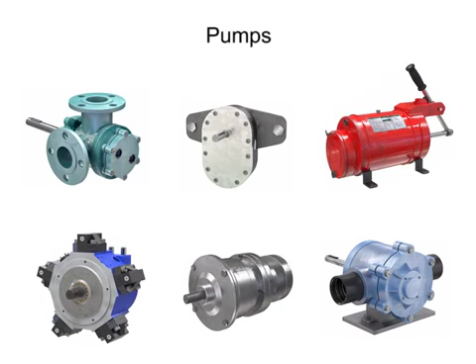Many different types of pumps exist to assist fluid movement in a variety of systems. An external gear pump uses two gears rotating against each other to provide fluid movement.

One gear is driven by a motor connected to a shaft. This is called the drive gear because it is driven by a motor, and it in turn meshes with and drives the movement of the second gear.

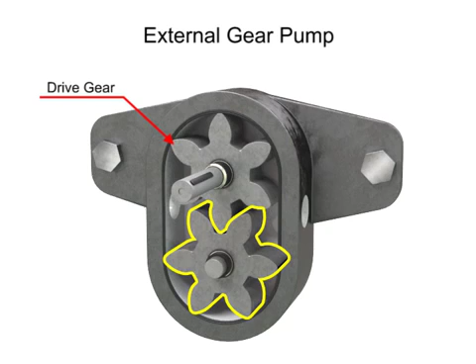As the gears rotate away from each other and come out of mesh, they create an expanding volume on the inlet side of the pump. This creates a vacuum at the inlet port, allowing fluid to flow into the pump.

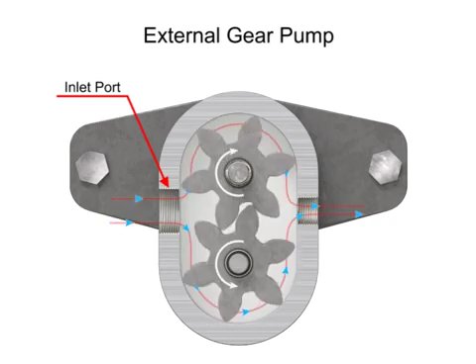Then fluid flows into the cavities and is trapped by the gear teeth. As the gears rotate, a flow path is created around the outside of each one. Fluid trapped in the slots between teeth is carried around and discharged into the cavity with the outlet port.

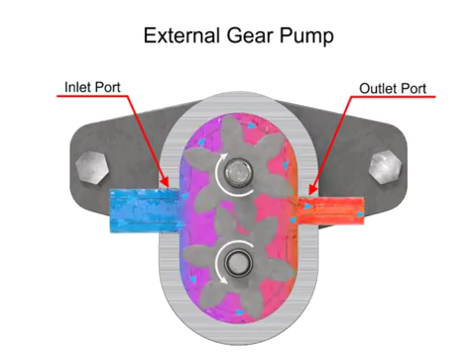Meshing of the teeth in the center of the pump seals the outlet port from the inlet port. No fluid passes between the gears.

The advantages of external gear pumps are their high speed and pressure, relatively quiet operation, and that their design accommodates a wide variety of materials.

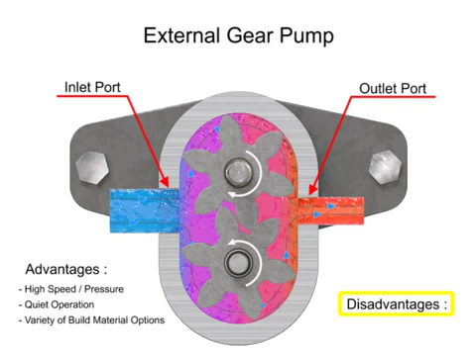Disadvantages include bushings in the liquid area can become worn and that they have fixed end clearances.

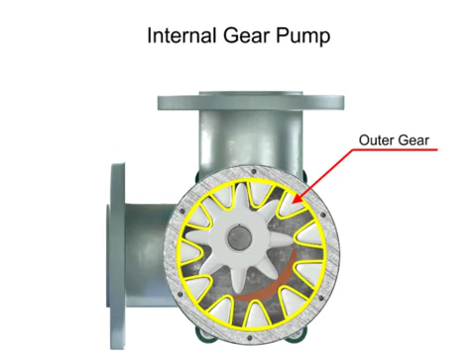Internal gear pumps are exceptionally versatile. This type of pump has one inner gear which is inside a second outer gear. The inner gear has a shaft driven by a motor and has teeth that protrude outward. The outer gear has teeth that protrude inward toward the center of the pump.

As the inner gear rotates, it meshes with and moves the outer gear. Liquid is trapped in the gear spaces and carried from the inlet to the discharge. A stationary crescent-shaped divider separates the intake and discharge portions of the fluid.

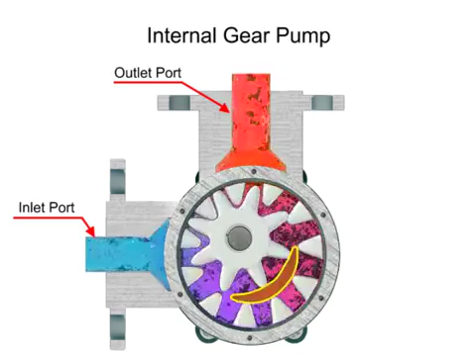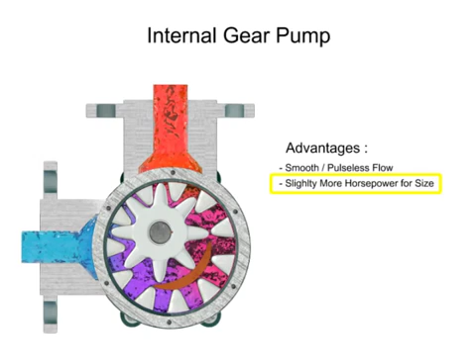Advantages of internal gear pumps are a smooth and almost pulseless flow, and slightly more horsepower for its size. Disadvantages are its higher cost, limited size range, low to moderate pressure ratings, and few sources of manufacture.

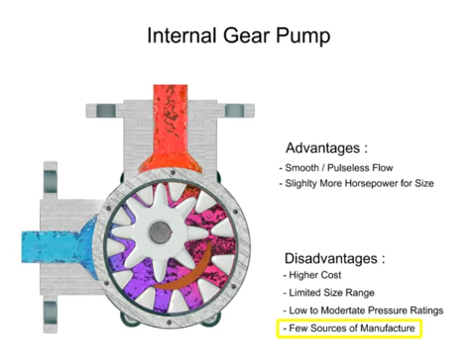A rotary vane pump is a positive displacement pump that consists of vanes mounted to a rotor. The vanes are on an off-center drive shaft. As the shaft rotates, the variable length vanes slide in and out to maintain contact with the pump housing.

The tension in the vanes is maintained by either springs or hydraulic pressure. As the vanes rotate, they create chambers of varying sizes within the pump.

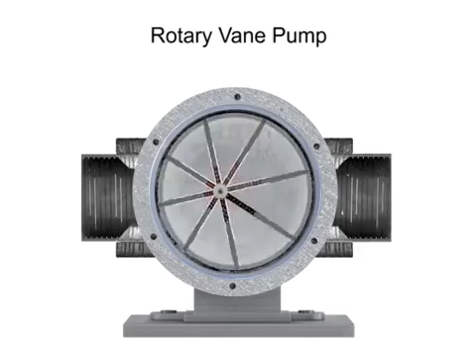Fluid enters at the largest chamber. As the vanes rotate and retract, the chambers get smaller, forcing fluid to exit through the discharge port.

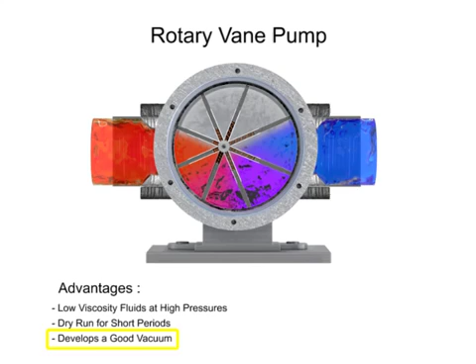The advantages of vane pumps are that they can handle low viscosity fluids at relatively higher pressures, can dry run for short periods, and develop a good vacuum. Their disadvantages include complexity and their unsuitability for both high pressure and high viscosity fluids.

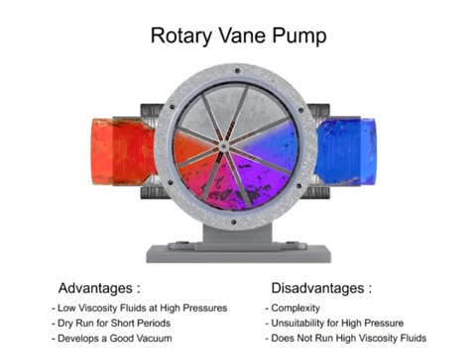Piston pumps come in many different forms. A swash plate is a device used to translate the motion of a rotating shaft into the reciprocating motion of a piston.

Swash plate piston pumps have a rotating shaft connected to a cylinder block containing pistons, which are pressed against a stationary swash plate that sits at an angle to the cylinder.

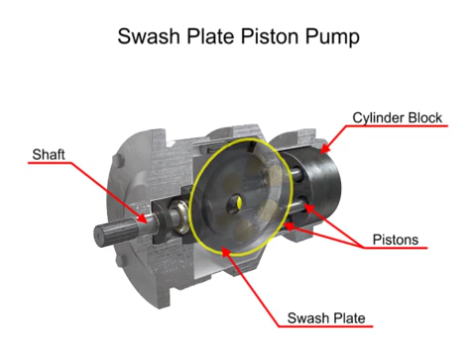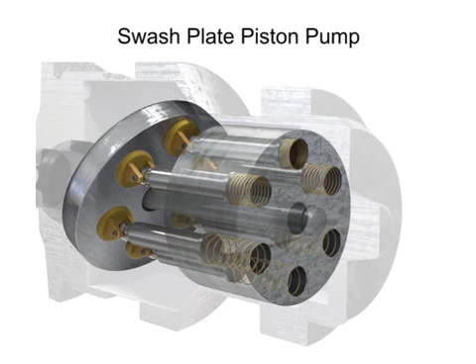As the shaft rotates, the pistons move against the swash plate, causing them to reciprocate within the piston block. The pistons create a vacuum that forces fluid in during half a revolution and expels fluid during the other half.

On the intake stroke, a spring ensures the pistons pull back and maintain contact with the swash plate, causing fluid to fill the empty cavity left behind.

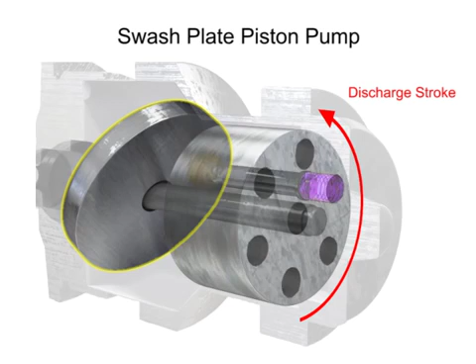On the discharge stroke, the angle of the swash plate forces the pistons back inside the piston block and discharges the fluid. The greater the slant on the swash plate, the further the pump pistons move and the more fluid they transfer.

Piston pumps, in general, are manufactured with closer internal fits than other pumps. This means that internal slippage can be less so that they operate with reasonable efficiency at pressures both too high or too low for the operation of other pumps.

Radial pumps are designed so the pistons stroke in a direction at right angles to the shaft.

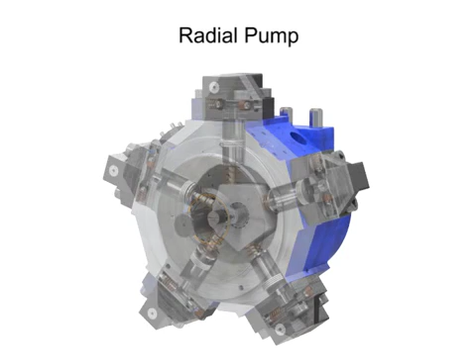The pistons are arranged like wheel spokes around a cylinder block with an eccentric central cam mounted on a drive shaft.

As the shaft rotates, the cam moves towards the pistons, forcing them down into the cylinder block and discharging the fluid. As the cam moves away, springs help retract the piston and cause the intake stroke. Check valves ensure that fluid only enters the inlet ports and only exits the outlet ports.

Radial piston pumps have a low noise level, very high loads at low speeds, and high efficiency.

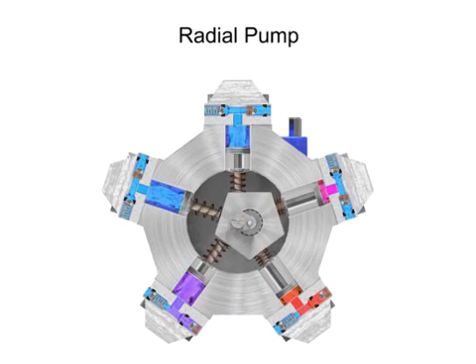Hand pumps are used when a source of power is not available or where the extra expense of a power pump isn't warranted. For example, they are used on shop presses and other portable equipment, serve as standby pumps, and serve as sources of emergency power.

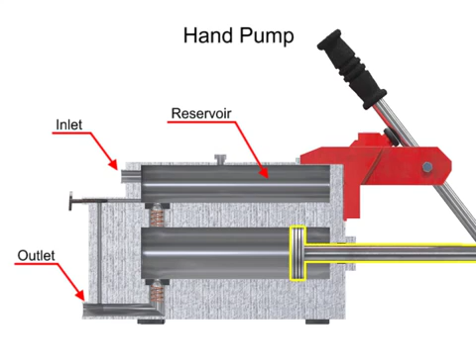Hand pumps are always of piston type and are usually constructed with a piston working between two check valves.

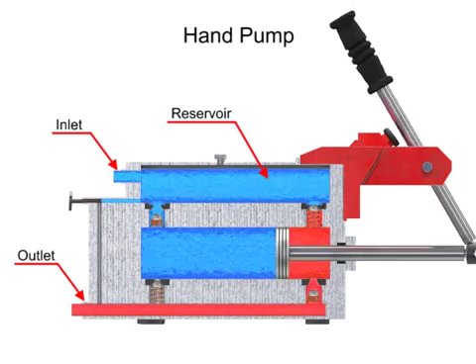Double-acting hand pumps are more efficient, allowing fluid to both enter and discharge on both strokes of the piston. Moving the pump handle in either direction allows fluid to be drawn in from the reservoir and discharged via the outlet ports. Check valves in all locations prevent fluid backflow.